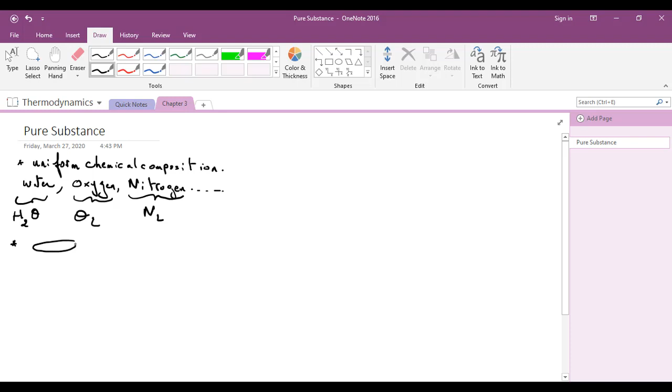To test whether a substance is a pure substance, we can, for example, take water in a tank and take different samples from different locations. We will always obtain from these different samples the molecule of H2O. So that means that water in this case has uniform chemical composition throughout.

Moreover, a pure substance can coexist in more than one phase. As we know, the different phases are solid, liquid, and vapor.

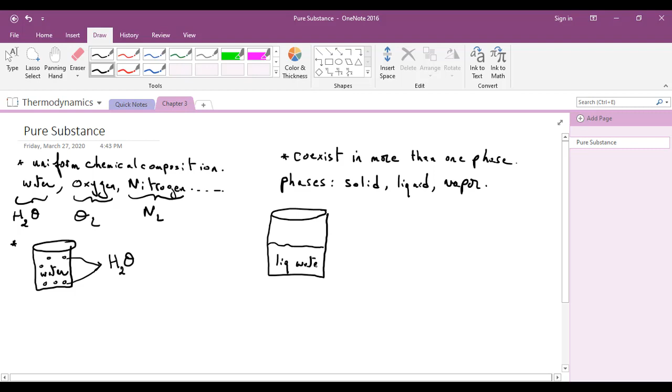Let's take for example water contained in a tank. Part of this tank is filled with liquid water, and the other part is filled with water vapor. So in this example, we have water coexisting in a liquid form and in a vapor form. If we take samples from different locations, from the liquid water and from the water vapor, we will also obtain the same chemical composition, H2O. So in this case, the mixture liquid-vapor is considered a pure substance.

However, let's take the example of oil and water. If we put oil and water in a tank, the oil will collect on top of the water, since oil is not soluble in water.

So if we take different samples from the two dissimilar regions, we will obtain different chemical compositions. So in this case, the mixture of oil and water is not a pure substance.

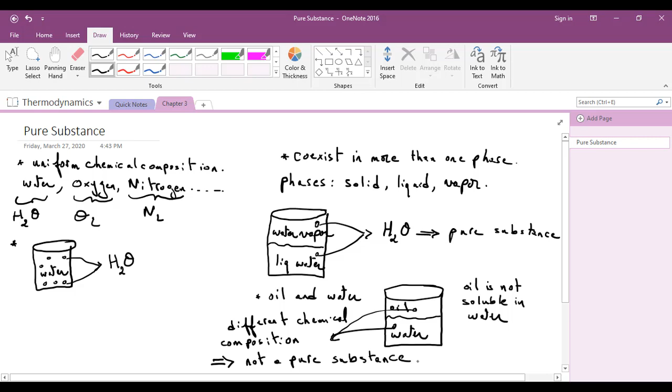In this section, we will talk about phase change processes of pure substances. We will use water to demonstrate the basic principles, since water is mainly a familiar substance. Water in steam power plants can exist in more than one phase. It can exist in vapor form inside the boiler device of the steam power plant, and it can exist in liquid form in the condenser of a steam power plant.

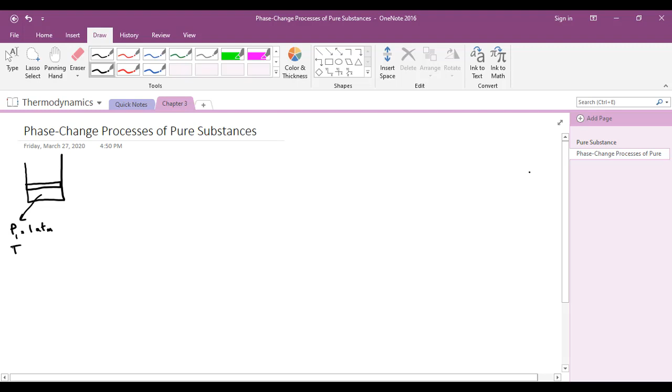So, in order to understand the phase change process of water, we will consider a piston-cylinder assembly where inside the cylinder we have water at a pressure of 1 atmosphere and a temperature T1 at 20 degrees Celsius. This will be state 1. You know that a state is a point described by two properties, mainly here the pressure and temperature.

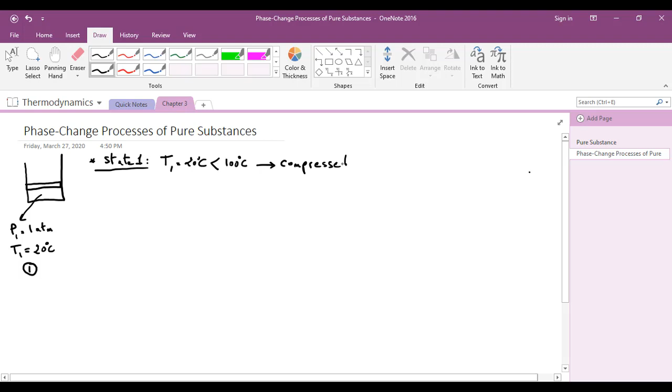So in state 1, as we can see, the temperature T1 equal to 20 degrees is less than the boiling temperature of water at 1 atmosphere. We all know that at this temperature the water will be in liquid form, and in thermodynamic terms we call it a compressed liquid, or subcooled liquid.

A compressed or subcooled liquid means that the water here is not about to vaporize, so it is far from vaporization. So any heat addition, any additional heat here, will not make the water start vaporizing. So we say the water in this case is called a compressed or subcooled liquid. So now we will start to add heat to the water.

So we will make a heat input to the water. The temperature will start to rise, and the specific volume V will slightly increase. This will be reflected by a slight expansion of the volume of water, or slight expansion of the piston.

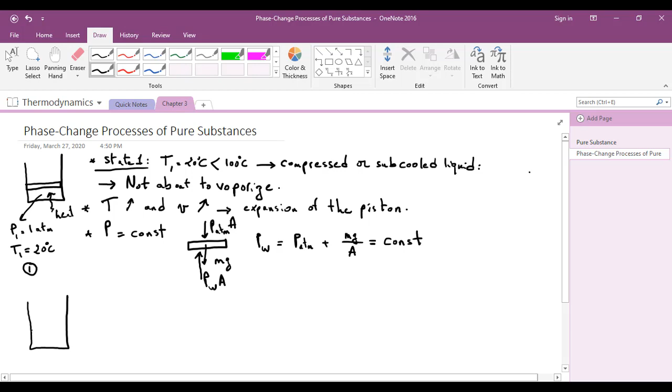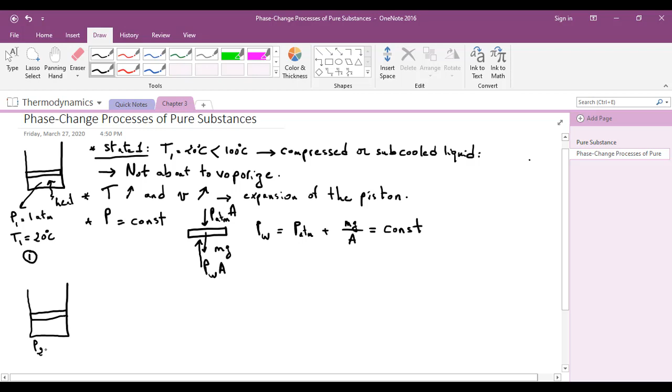So if we consider state 2, we have P2 equal to 1 atmosphere, and T2 now equal to 100 degrees Celsius. This will be state 2. So for state 2, at this point the water is still a liquid.

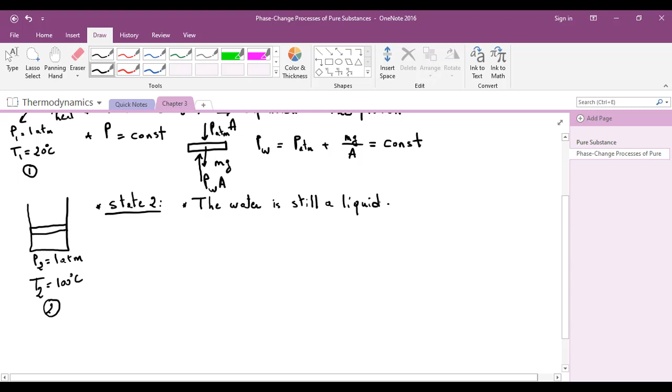But any further heat addition will cause some of the liquid contained in the piston-cylinder assembly to start to vaporize. So a liquid that is about to vaporize is called a saturated liquid. A saturated liquid is a liquid that is about to vaporize.

A saturated liquid is a liquid that has reached the boiling temperature, as in this case 100 degrees Celsius, but is still completely a liquid. So any additional heat will cause some of the liquid to start vaporization. So state 2 will be a saturated liquid state.

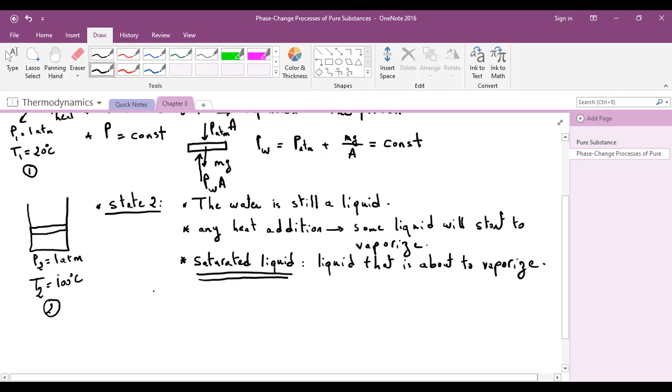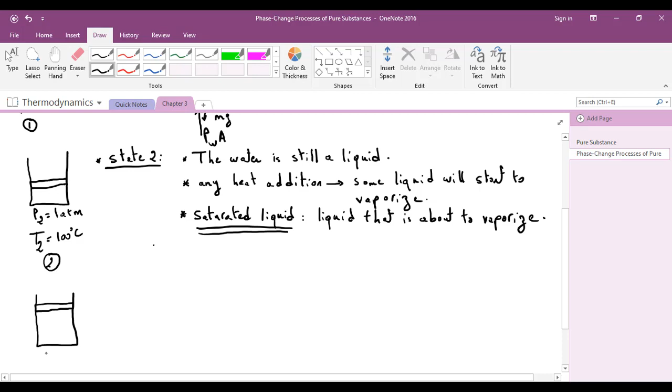Now heating will continue, and we will investigate state 3. The pressure at 3 is also 1 atmosphere. The temperature at 3 will be equal to the temperature at 2, 100 degrees Celsius. This is very important, since now the temperature is at the boiling temperature. Any heat addition will not cause the temperature to rise. However, the heat addition will mainly cause the phase change from liquid to vapor.

So in state 3, temperature remains constant. In this state there is phase change from liquid to vapor. Let's say we are midway of the vaporization process, we can see that some region of the water inside the piston cylinder is converted to vapor, and some region is still a liquid. So as we add more heat, more of the liquid will be converted to vapor form.

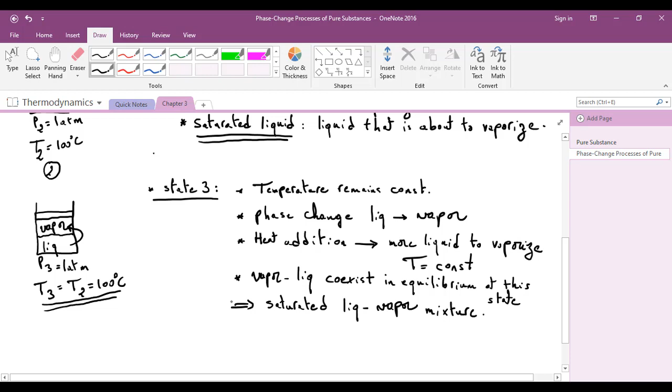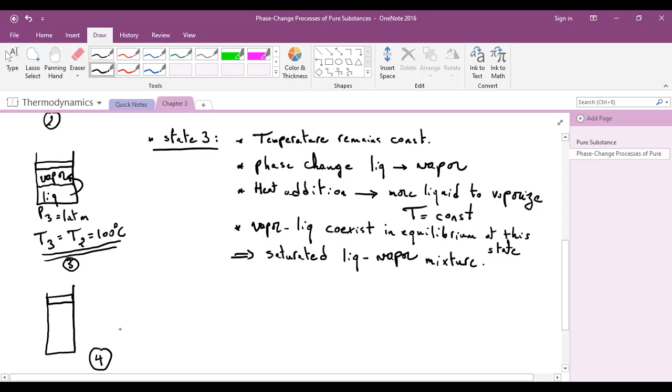So once now the phase change is completed, now we'll be at state 4. The pressure P4 will still be equal to 1 atmosphere, and the temperature at the end of the vaporization is still 100 degrees Celsius, and we will have just vapor inside the piston cylinder.

So at state 4, the phase change process is now completed. All the liquid is now converted to vapor, so we have only vapor. But here, any heat loss in this state will cause the vapor to condense.

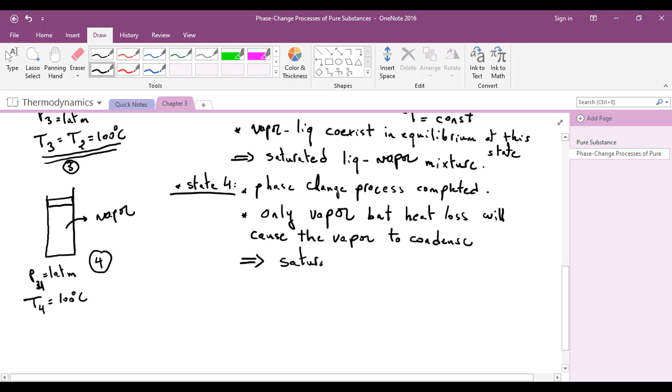So we call this state the saturated vapor state. We should note that when there is formation of vapor, the specific volume will now increase further when compared to when there was liquid. So after completion of the phase change process, we have only vapor, a saturated vapor state.

At this state, any heat loss from the vapor will cause some condensation and some liquid vapor to appear. So a vapor that is about to condense is called a saturated vapor.

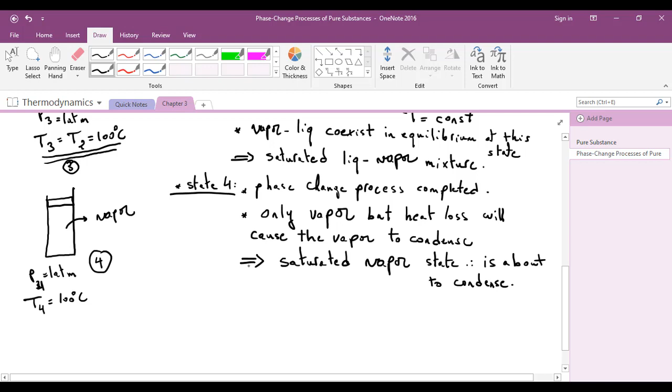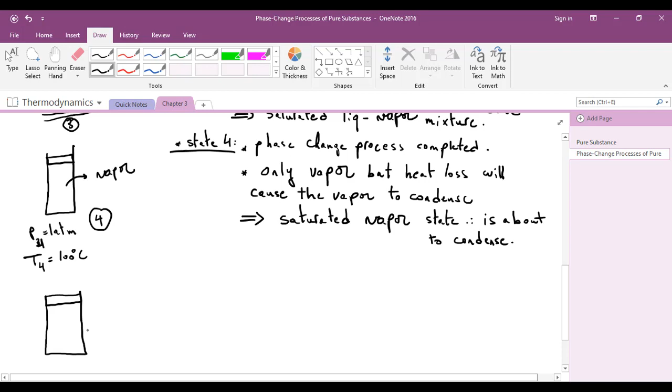So if we continue heating now, since the phase change process is completed, the temperature will start to rise again. So here at state 5, the pressure is still the same. Let's say we continue heating until the temperature reaches, let's say, 300 degrees Celsius. So at state 5, temperature will increase also, and the temperature is above the boiling temperature, 100 degrees Celsius.

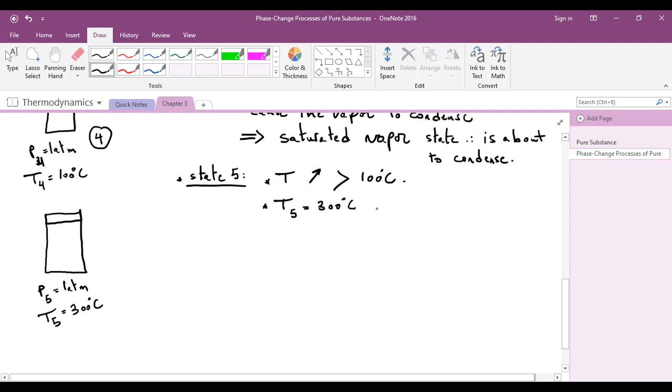So T5 equal to 300 degrees Celsius, the vapor, so any heat loss here will not cause the vapor to condense. So the vapor is not about to condense. So we call it here, the vapor is called a superheated vapor. So a vapor that is not about to condense is called a superheated vapor.

Moreover, we should note two different statements. What do we mean by the saturation temperature and saturation pressure? So now we will explain what we mean by saturation temperature and saturation pressure.

We all know that water boils at 100 degrees. But stopping at 100 degrees in this statement will be slightly incorrect, because water will boil at 100 degrees at a pressure of 1 atmosphere, since the boiling temperature is related to the pressure. So as the pressure is increased, the boiling temperature will also increase. So the two parameters are dependent.

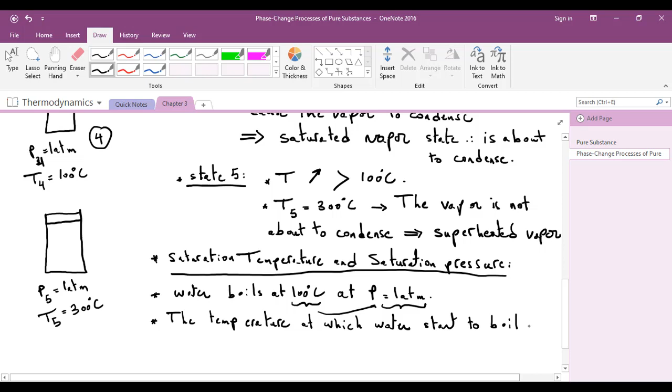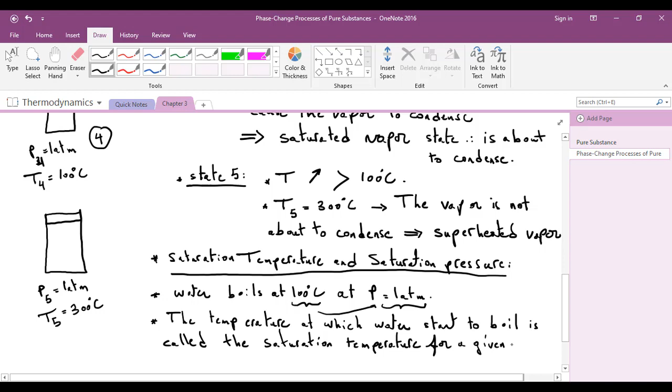If the temperature at which water will start to boil at a given pressure is called the saturation temperature. So the temperature at which water, or any pure substance, starts to boil is called the saturation temperature, for a given fixed pressure.

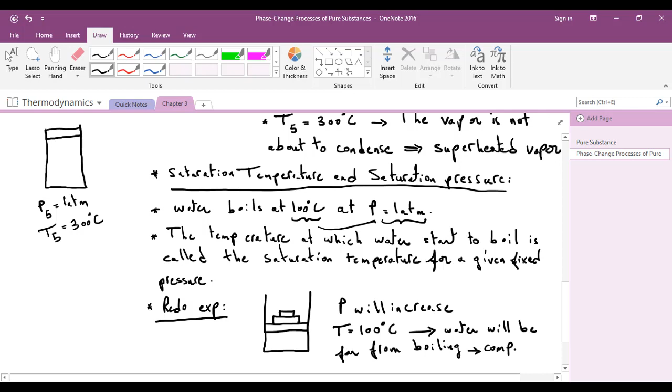If we redo our experiment but we increase the pressure, how do we increase the pressure? Mainly we add weights, we add mass on the piston, and now the pressure P will increase. So at T equal to 100 degrees, the water will be far from boiling. So at T equal to 100 degrees, the water will be considered a compressed or subcooled liquid. So as the P increases, the saturation temperature T sat will also increase.

Moreover, we can say also that for a given temperature, the pressure at which boiling will start is called the saturation pressure.

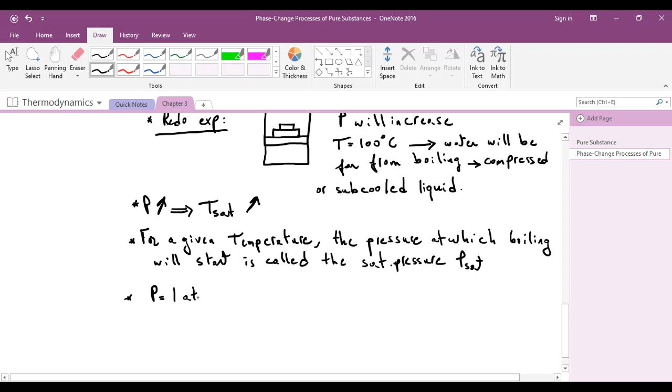In other terms, at P equal 1 atmosphere, T sat is equal to approximately 100 degrees Celsius. At T equal 100 degrees, for the water to start vaporization, the pressure is called the saturation pressure, which is 1 atmosphere.

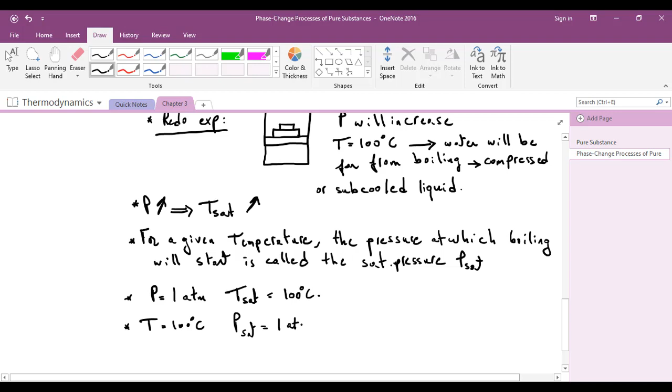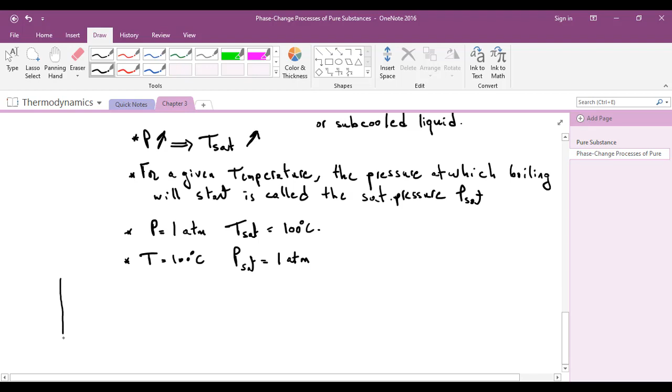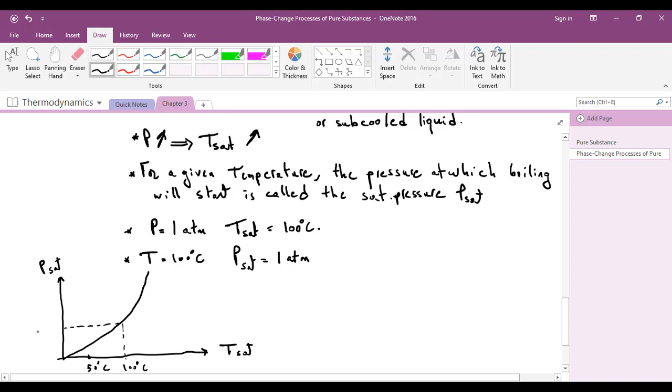The relation between saturation pressure and saturation temperature, P sat versus T sat, has an increasing curve. Let's say here we have 50, 100. So for a T saturation of 100, we have approximately atmospheric pressure. Let's say the units are kilopascal and the temperature is in degrees Celsius. For example, for a temperature of 150,

we have a saturation pressure of 475.8 kilopascal, which means about 4.75 bars. So at a pressure of 4.75 bars, the temperature at which water will start to vaporize is 150 degrees Celsius, so the T saturation for a pressure of 4.75 bar is 150 degrees Celsius.

That's why a good example in practical life is that it takes a shorter amount of time to cook using a high pressure pan. Cooking with a high pressure pan takes shorter time, since the food will cook quicker at higher temperature.

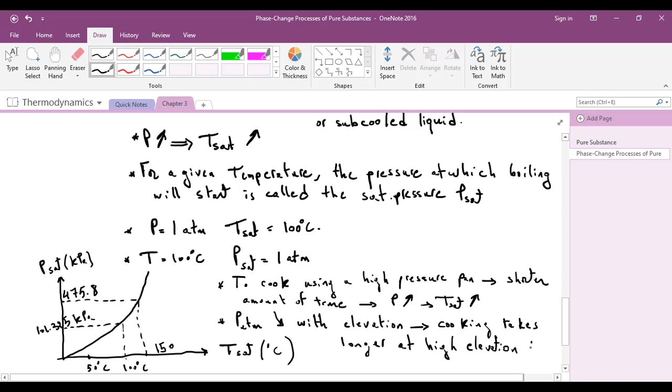So we expect that cooking takes longer at high elevations, since the saturation temperature will decrease, so we cook at lower temperature, which means the time required for the food to cook will be longer.

Finally, we want to know what we mean by latent heat. Latent heat is the energy absorbed or released during phase change, mainly when the temperature is equal to Tsat and is constant. As mentioned before, during phase change the temperature remains constant.

So the energy absorbed during the phase change from liquid to vapor, during vaporization, is called the latent heat of vaporization.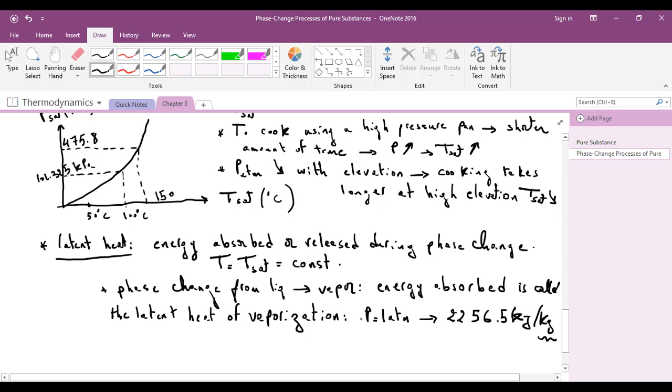For example, at a pressure of 1 bar, or P equal 1 atmosphere, the latent heat of vaporization for water is equal to 2256.5 kilojoule per kilogram. What does this mean? It means that if we take 1 kilogram of water at a saturation temperature of 100 degrees, or at a pressure of 1 atmosphere where Tsat is 100 degrees, and the water has reached the saturated liquid condition,

to be converted from saturated liquid to saturated vapor, we need energy equal to 2256.5 kilojoule for every kilogram of water. We should note that we start from the saturated liquid state to the saturated vapor state, not from the subcooled state. From the saturated liquid, once the liquid has reached Tsat of 100 degrees, we start supplying energy. If we count this energy absorbed during the phase change to the saturated vapor, it will be equal to 2256.5 kilojoule per kilogram.

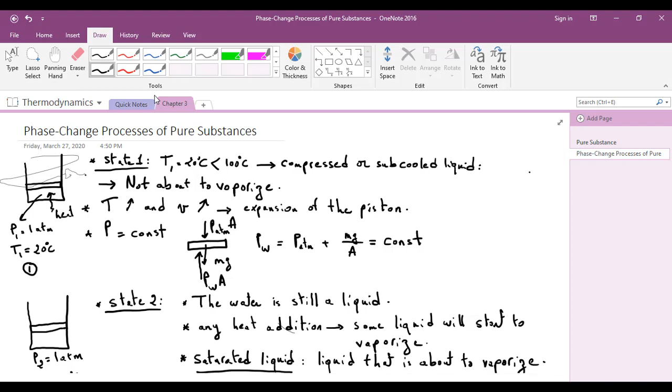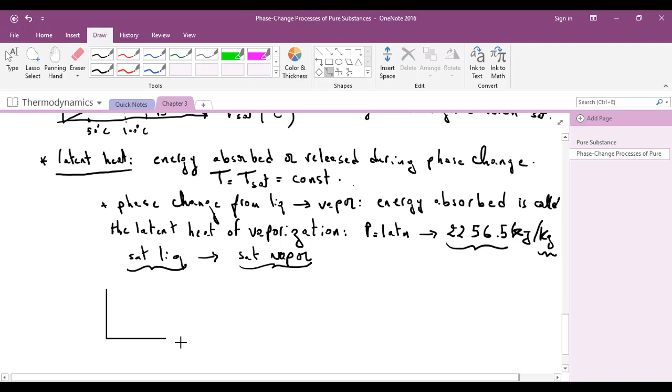Finally, I want to draw the heating process we did before, from state 1 to state 5, on a T-V diagram. On the y-axis we have T, and on the x-axis we have the specific volume V. Let's say this is state 1, with a temperature of 20 degrees Celsius.

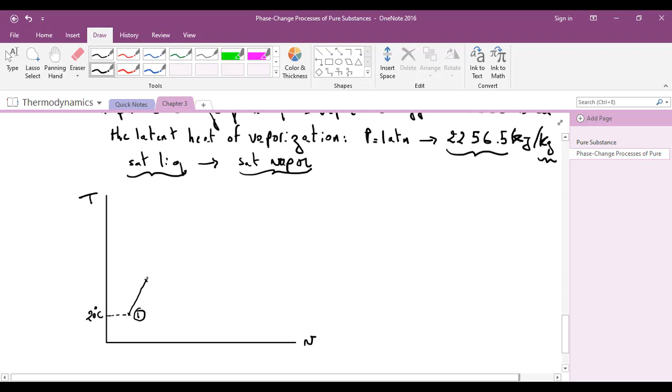So we start adding heat. The specific volume will slightly increase. The slope of this line is high, since the liquid will increase in volume only a small amount. As heat is supplied to the piston cylinder, we reach the saturation temperature of 100 degrees Celsius at state 2.

Now any further heat addition will cause a phase change at constant temperature. Somewhere in the middle is state 3, where we have a mixture of liquid and vapor. Any more heat addition will vaporize more of the liquid until we reach state 4.

At state 4 there is no more liquid, we have saturated vapor, and once the water is completely vapor and the phase change process has completed, any more heat addition will cause the temperature to rise. The slope of the line here is smaller, since the vapor will expand more compared to a liquid. We will reach state 5, for example, which has a temperature higher than the saturation temperature, and the vapor in this case is called superheated vapor.

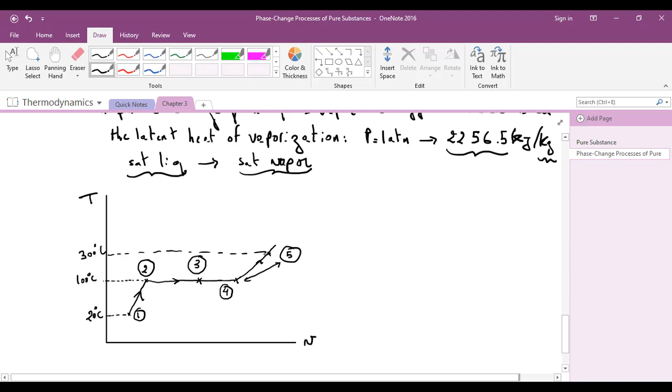So subcooled liquid is far from vaporization at state 1. Heating will increase the temperature. Once we reach the saturation temperature, the temperature will cease to rise, and phase change begins. Part of the liquid will be converted to vapor as we add more heat, giving a mixture of liquid and vapor. At the end of the phase change process, all the liquid is converted to vapor, and once this is completed, heat addition will make the temperature start rising again, giving a vapor far from the saturation temperature, called superheated vapor. See you in the next video.